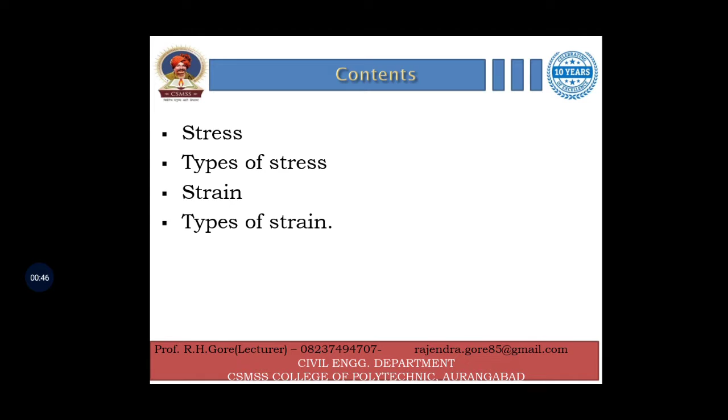तर आजच्या या लेक्चरमध्ये आपण बघणार आहोत स्ट्रेसेस, त्यानंतर इट्स टाईप्स, स्ट्रेन अँड ऑल्सो इट्स टाईप्स. तर फर्स्ट सुरुवात करूयात स्ट्रेसपासनं.

द इंटरनल रेजिस्टिंग फोर्स डेव्हलप पर युनिट क्रॉस सेक्शनल एरिया इज डिफाईन्ड ॲज स्ट्रेस. म्हणजेच जर बॉडीवरती एखादा एक्सटर्नल फोर्स अप्लाय केला आणि त्यामुळे जो इंटरनल फोर्स डेव्हलप होतो, तर त्या इंटरनल रेजिस्टिंग फोर्स अपॉन क्रॉस सेक्शनल एरिया, म्हणजे जी क्वांटिटी भेटेल ती म्हणजे स्ट्रेस.

जसं की एखादी रेक्टँग्युलर बॉडी कन्सिडर केली आणि त्याच्यावरती P किलो न्यूटनचा फोर्स अप्लाय केला, आणि त्या बॉडीचं जर क्रॉस सेक्शनल एरिया A असेल तर स्ट्रेस काय होईल - P अपॉन A.

सेकंड डेफिनेशन आहे स्ट्रेसची - इंटरनल रेजिस्टन्स अगेन्स्ट डिफॉर्मेशन्स. सेम आहे दोघांचाही अर्थ. स्ट्रेस इज डेनोटेड बाय अ लेटर सिग्मा, इज अ ग्रीक लेटर, and the SI unit of stress is Newton per mm square or kilonewton per meter square or megapascal or gigapascals.

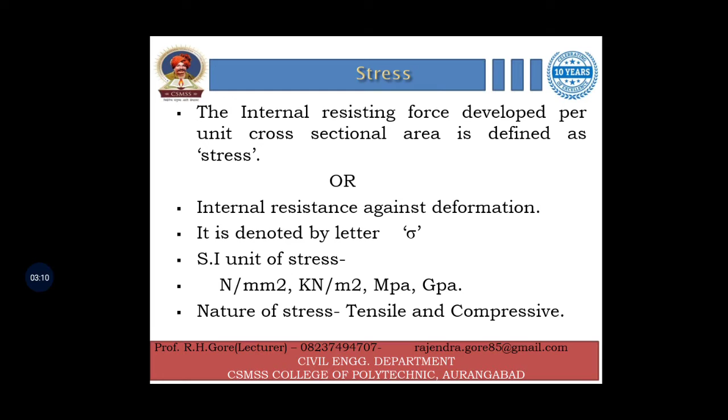तर नेचर ऑफ स्ट्रेसेस जे असतात ते टेन्साईल किंवा कॉम्प्रेसिव्ह असू शकतात. जनरली टेन्साईल स्ट्रेसेस आपण पॉझिटिव्ह कन्सिडर करतो फॉर साइन कन्व्हेन्शन, आणि कॉम्प्रेसिव्ह स्ट्रेसेस हे निगेटिव्ह कन्सिडर करतो.

तर या ठिकाणी डायग्राममध्ये बघू शकता - एक सर्क्युलर क्रॉस सेक्शनल बॉडी किंवा रॉड कन्सिडर केला आहे आणि त्या रॉडवरती एक्सटर्नल P किलो न्यूटनचा फोर्स टेन्साईल नेचरचा अप्लाय केला आहे.

Due to this P kilonewton load in body, there is internal resisting force R is developed. So this R or internal resisting force is equal to the external applied force up to the certain limit, means up to the elastic limit.

तर त्या इलास्टिक लिमिट ज्या आहेत त्या बघणारच आहोत आपण स्ट्रेस स्ट्रेन कर्वमध्ये. त्या लिमिटपर्यंत जर बॉडीवरती लोड अप्लाय केलेला असेल तर इंटरनल रेजिस्टिंग फोर्स is equal to the external applied load. So sigma is equal to, means stress is equal to resisting force upon cross sectional area.

So resisting force is denoted by capital R and cross sectional area is capital A. So R by A, resisting force is equal to the external applied force P. So P by A is stress. Sigma is equal to P by A.

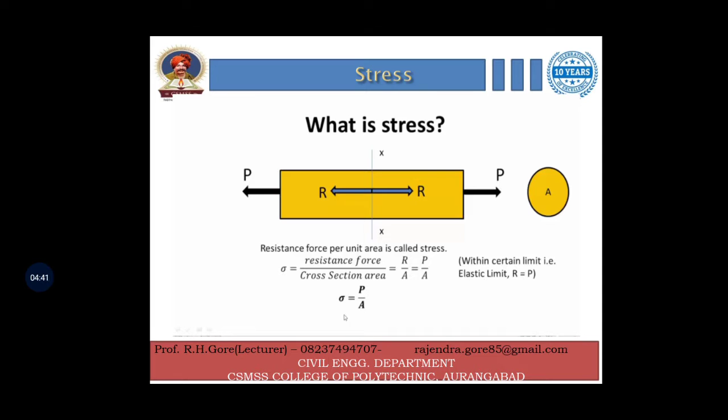Then types of stress. There are generally three types: direct stress, shear stress and bending stress. And the direct stress is also divided into two types: tensile and compressive stress. So first, direct stress.

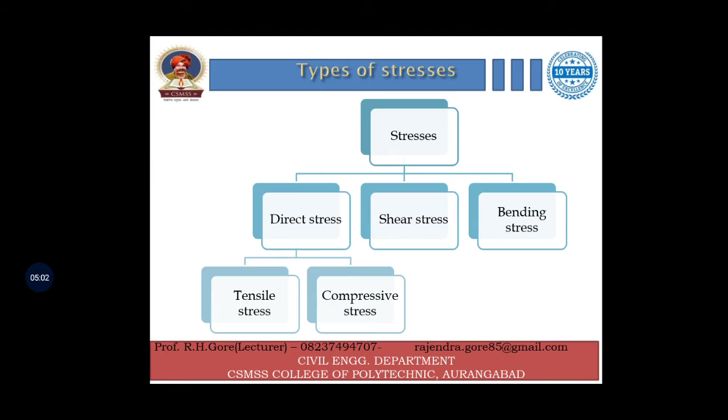So direct stress is also called as normal stress. The stress which acts normal to the plane on which the force acts axially are called as direct stress or normal stress.

म्हणजे असा स्ट्रेस जो की बॉडीच्या प्लेनवरती नॉर्मली ॲक्ट केलेला असेल, म्हणजेच परपेंडिक्युलर डायरेक्शनला जर प्लेन असेल, परपेंडिक्युलर टू द प्लेन जर लोड असेल, तर तो स्ट्रेस असतो डायरेक्ट स्ट्रेस. आणि डायरेक्ट स्ट्रेस इज डेनोटेड बाय सिग्मा सफिक्स 0.

आणि डायरेक्ट स्ट्रेसचे 2 टाईप्स आहेत. देअर आर डिवायडेड इंटू 2 टाईप्स, टेन्साईल स्ट्रेस आणि कॉम्प्रेसिव्ह स्ट्रेस.

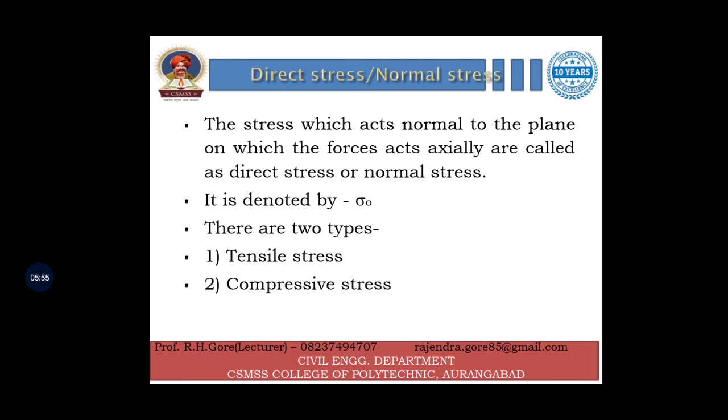So tensile stress, when 2 equal and opposite pull is applied on the member, then member or body is subjected to tension and stress so developed into the body is called as tensile stress.

म्हणजेच एखाद्या बॉडीवरती जर आपण पुल नेचरचे फोर्स किंवा लोड ॲक्ट केले, तर त्या बॉडीमध्ये जो स्ट्रेस डेव्हलप होणार आहे तो होणार आहे टेन्साईल स्ट्रेस डेव्हलप. सो पुल नेचरचे फोर्सेस म्हणजे कसेच, तर यामध्ये फिगरमध्ये बघू शकता तुम्ही.

Consider this is a body and the load acting on each, the arrow or the load is acting away from the body, that is called as pull nature of force.

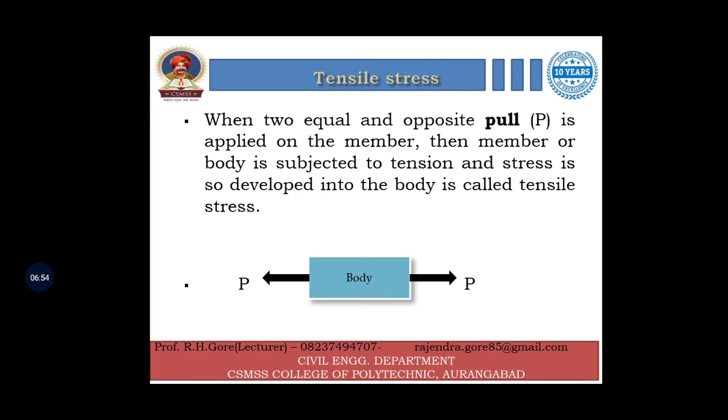Tensile stress is denoted by sigma suffix t. So tensile stress is applied or internal resisting force upon area, so P upon A. So P is axial tensile force and A is cross sectional area.

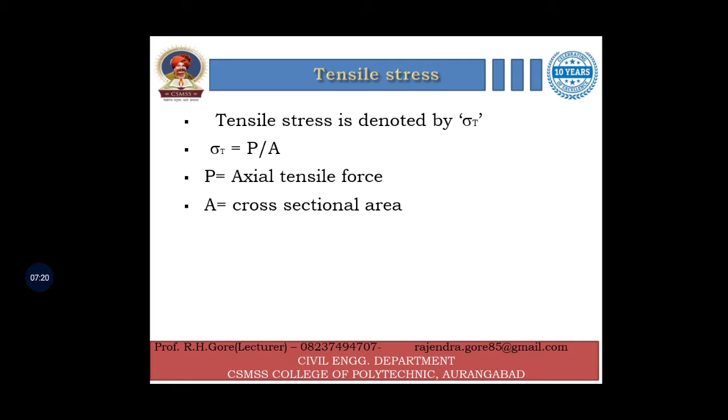Then compressive stress. When two equal and opposite pushes are applied on the member, the member or body is subjected to compression, and the stress so developed in the body is called compressive stress.

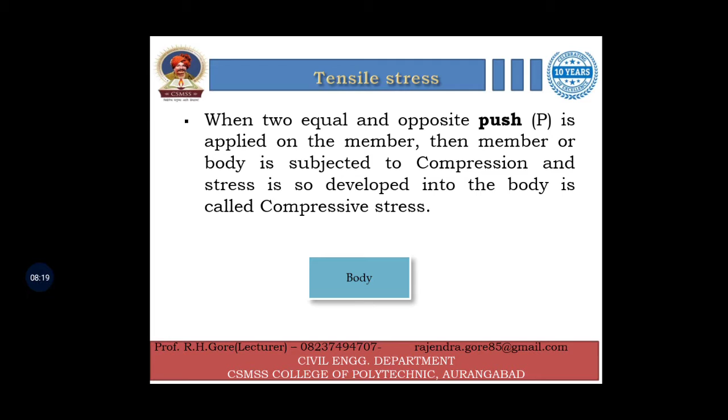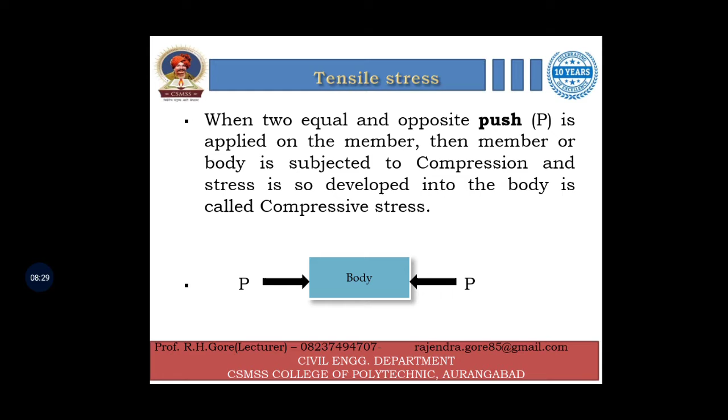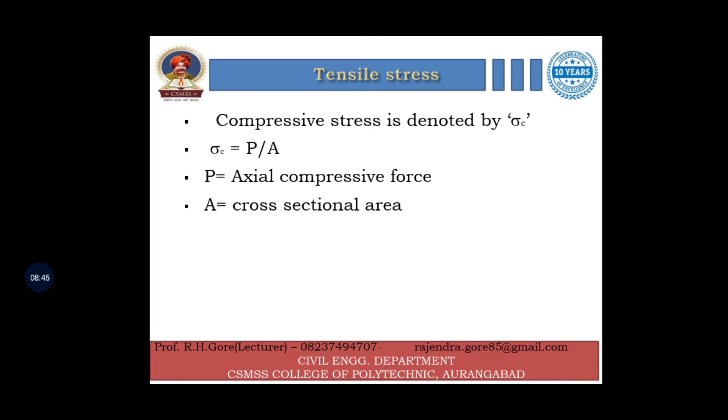Consider a body, and the load acting towards the body is called compressive load. This P kilonewton load compresses the body from two sides. Compressive stress is denoted by sigma suffix C for compression, and T for tension. So sigma C is equal to P by A, where P is axial compressive force and A is cross sectional area.

Then shear stress. When equal and opposite forces act tangentially on a body across the resisting section, the body tends to shear off or slide across the section. In such a case, the stress so developed in the body is called shear stress.

When a tangential load is applied on the surface of a body, this force is called shear force, and due to this tangential or shear force, the stress developed is called shear stress. Shear stress is denoted by the letter small q or tau, and its SI unit is the same as stress unit, Newton per mm square, or megapascal, or gigapascal.

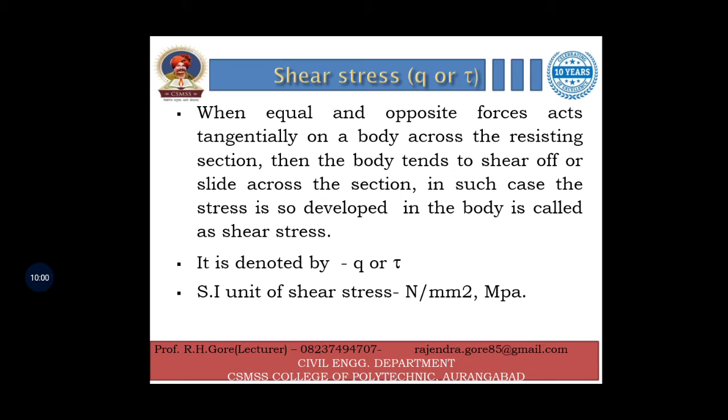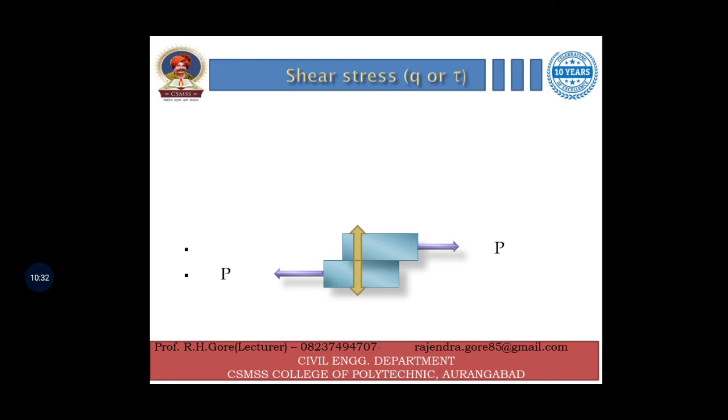Consider two rectangular plates connected by means of rivets or bolts, and two tensile forces P kilonewton applied on these plates. Due to this external applied force P, the body tends to shear off or slide on each other's plane. In the section of the rivet, the stress developed is called shear stress, and the plane on which shear stress is developed is called the plane of shear. The load P is called shear force.

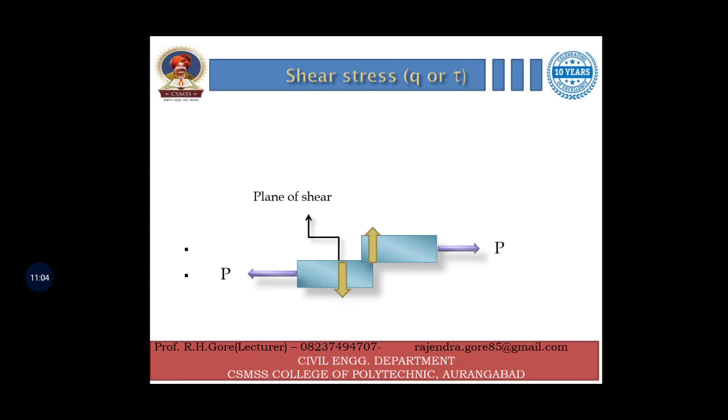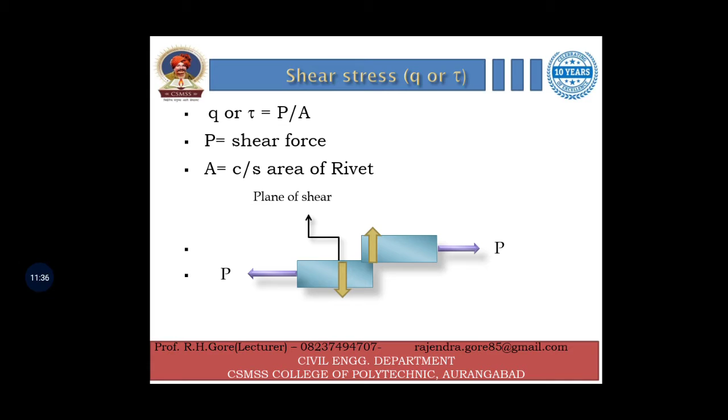So shear stress Q or tau is equal to P upon A, where P is called shear force and A is the cross section of a rivet. Why is the area of the rivet considered? Because the shearing action takes place in the cross section of rivets. So the area considered is the cross sectional area of rivet, which is pi by 4 into d square, where d is diameter.

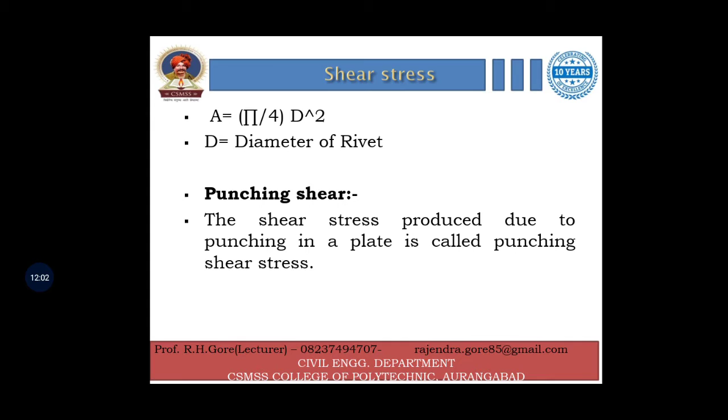Then punching shear. The shear stress produced due to punching in a plate is called punching shear stress. While punching the plate, the stress developed in the plate is called punching shear stress. Consider a rectangular plate having thickness T and a punch having diameter D. Due to applying compressive force on the punch and plate, the punching action takes place, and due to this punching action, shear stress is developed.

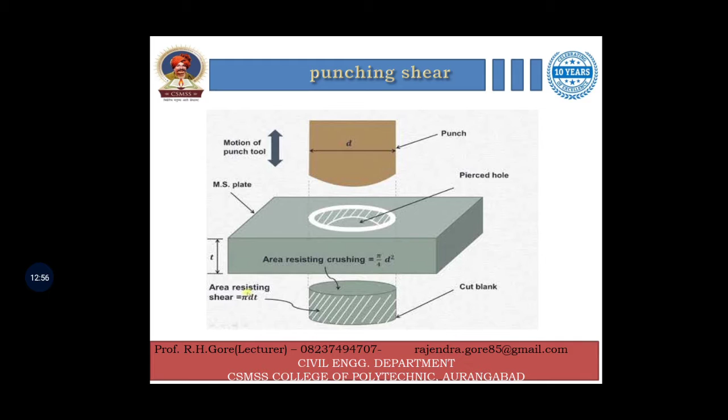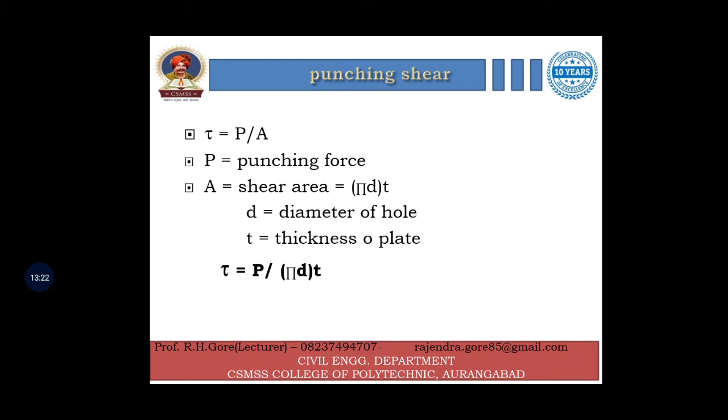The load applied on the punch is called shear force, and the cross sectional area resisting this shear force is the circumferential area of the plate, that is pi into d t. So punching shear stress tau is equal to P by A, where P is punching force or shear force, and A is shearing or resisting area, pi d into T, where pi is the circumference relation, d is diameter, and T is thickness of plate. So shear or punching stress is equal to P upon pi d t.

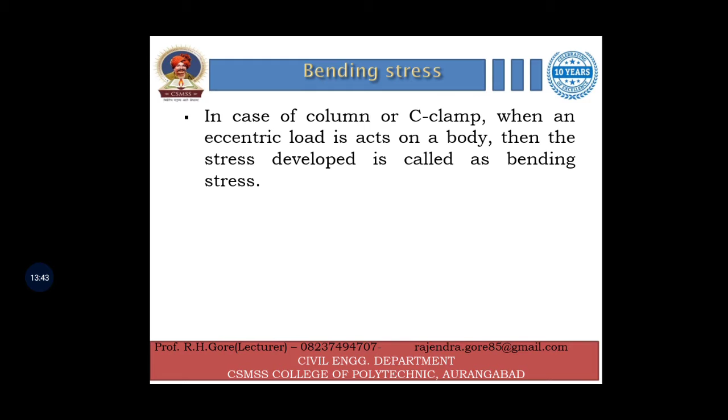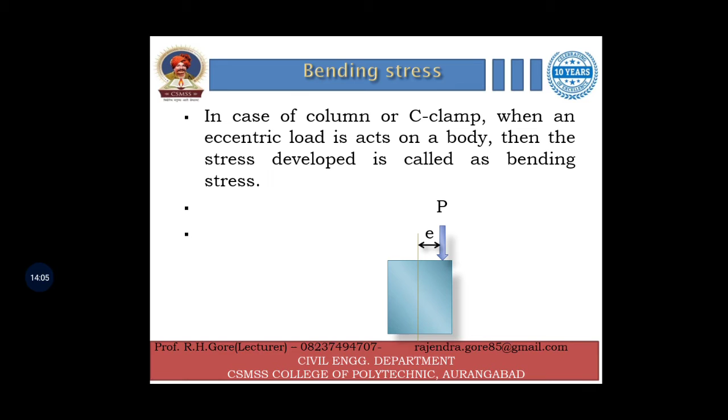Then bending stress. In case of a column or C-clamp, when an eccentric load acts on a body, the stress developed is called bending stress. Consider a column with an eccentric load P acting at a distance E from the centroidal axis of the column. Due to this eccentric load, the stress developed is called bending stress.

Then strain. When a body of elastic material is acted upon by an axial force, it undergoes a change in dimensions, and this change in dimension per unit original dimension is called strain. It is the ratio of change in dimension to the original dimension. Strain is denoted by the letter small e or epsilon, and since it is the ratio of two similar quantities, it is a unitless quantity. So strain small e is equal to change in dimension divided by original dimension.

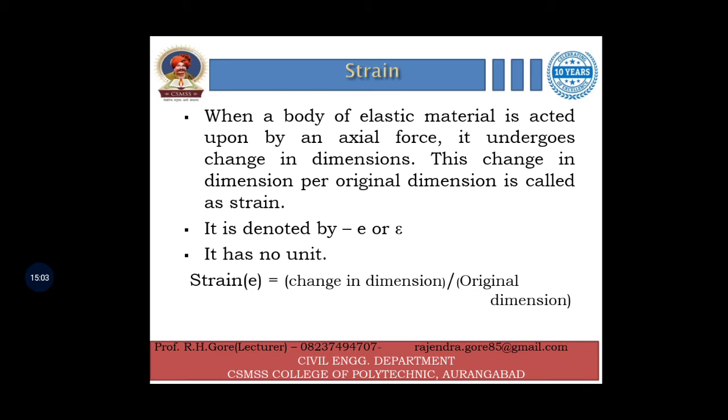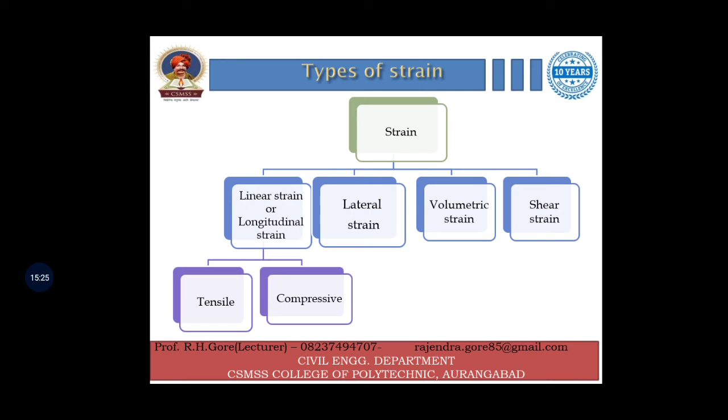So types of strain: first is linear strain or longitudinal strain, then lateral strain, volumetric strain, and shear strain. Linear strain is divided into two types, tensile strain and compressive strain. So first, linear strain.

When the body of elastic material is subjected to a load, then there is change in length in the direction of applied force, and this change in length per unit original length is called linear strain.

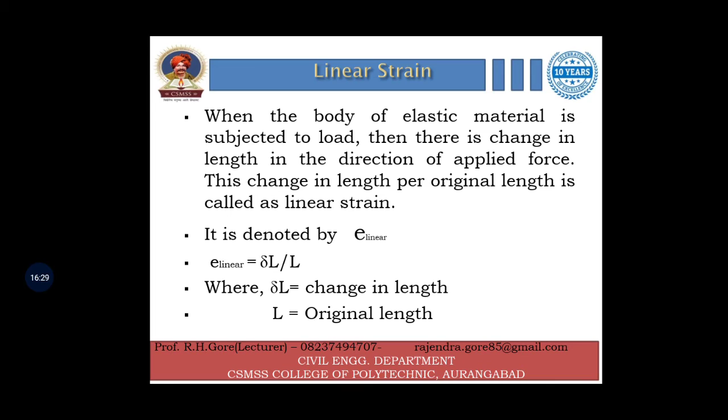Linear strain म्हणजे काय? It is the ratio of change in length to the original length, and linear strain is denoted by E suffix linear, where E stands for strain and linear is the type of strain. So E linear is equal to delta L by capital L, where delta L is change in length and capital L is original length. It is the ratio of these two quantities.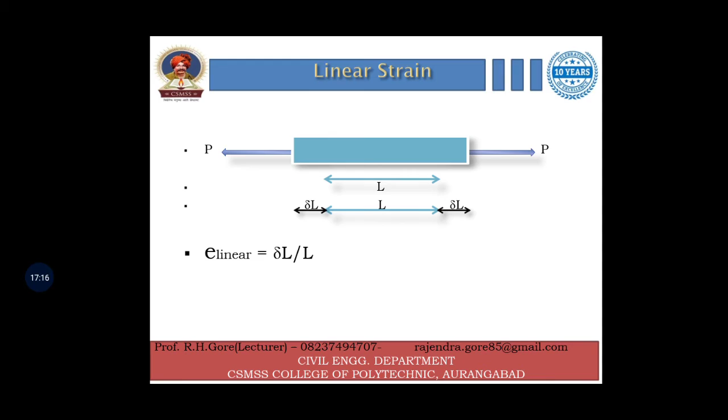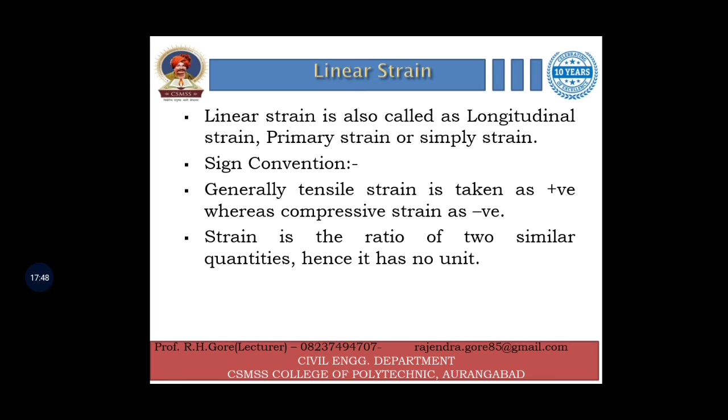Consider a rectangular bar subjected to tensile force P along its length, having length of bar L meter. Due to this applied tensile force P, the bar gets deformed by delta L, its change in length, and the ratio delta L by L is linear strain. Linear strain is also called longitudinal strain, primary strain, or simply strain. The sign convention: tensile strain is taken as positive, whereas compressive strain is taken as negative. Strain is the ratio of two similar quantities, hence it has no unit.

Then lateral strain, the second type of strain. When the body of elastic material is subjected to load, there is change in lateral dimensions, meaning perpendicular to the applied force - change in width, change in thickness in case of rectangular bar, and change in diameter in case of circular bar. This change in lateral dimension to original lateral dimension is called lateral strain or secondary strain. So in linear strain there is change in length upon original length, and in lateral strain it is change in lateral dimension to original dimension. It always acts at a right angle to the direction of applied force.

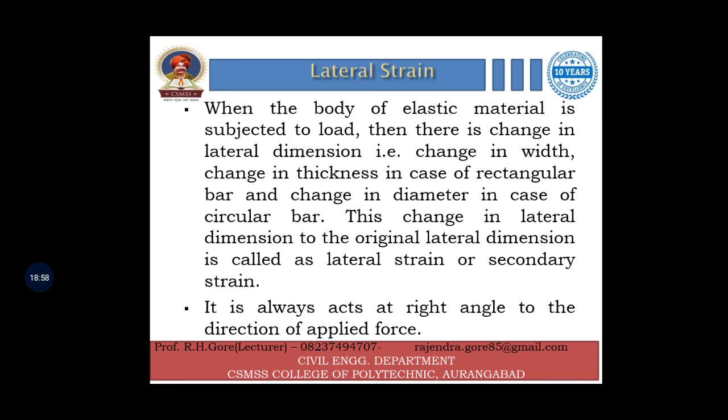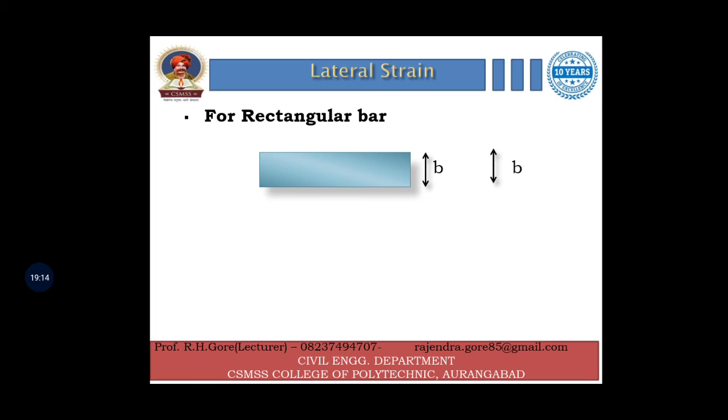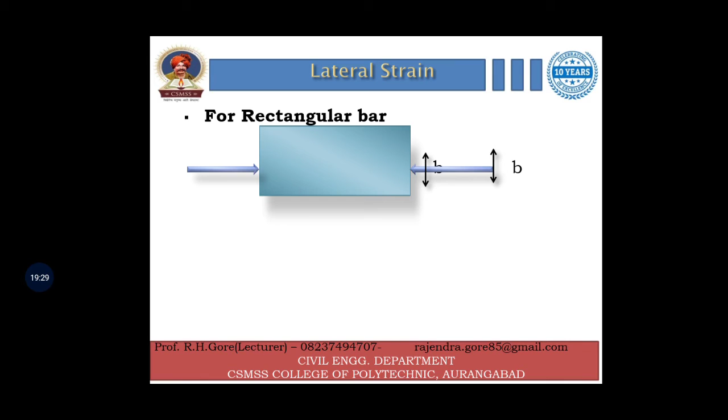The dimension changes at right angle to the applied force. In the figure we can see the detailed concept. There is a rectangular bar having cross-sectional width B and length L, and a compressive force P is acting on this. Due to this compression the lateral dimension changes as delta B from both sides, and this lateral strain is change in width upon original width, similar to linear strain.

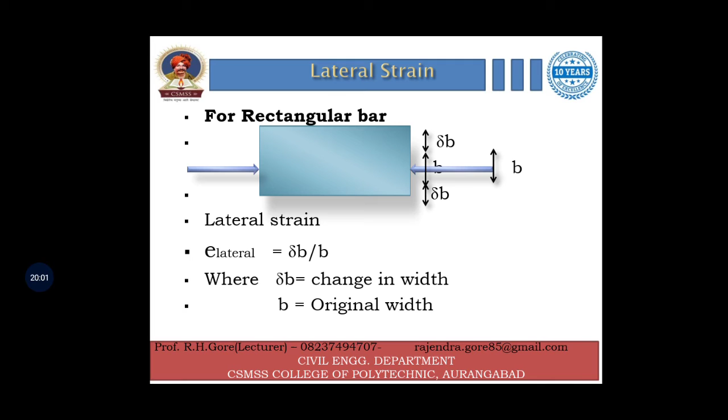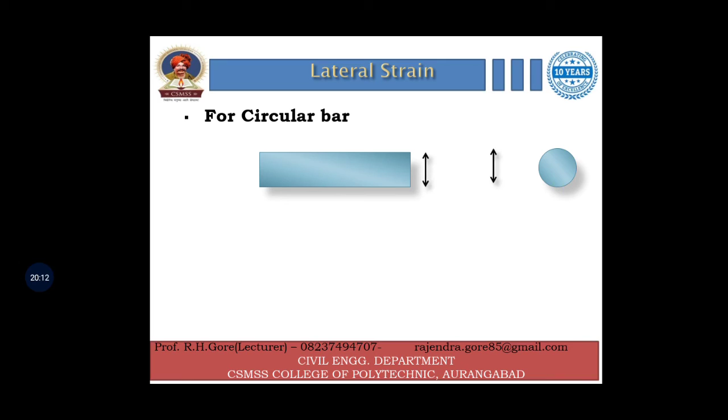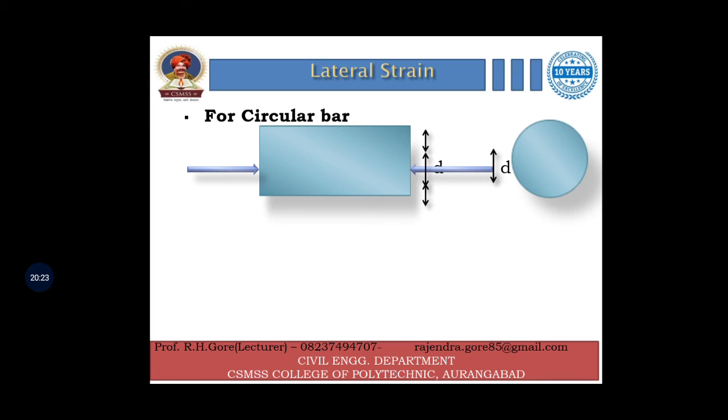In linear strain the longitudinal dimension changes, and in lateral strain the lateral dimension changes - change in width upon original width in case of rectangular bars. In case of a circular bar having diameter d, due to the applied compressive force the cross-sectional dimension changes, so there is change in diameter. This change in diameter to the original diameter is also called lateral strain.

Note: when axial tensile force acts on a body, its length increases but width and thickness decrease, since due to the extension of length, the other two dimensions decrease. And when compressive force acts on a body, its length decreases and width and thickness increase.

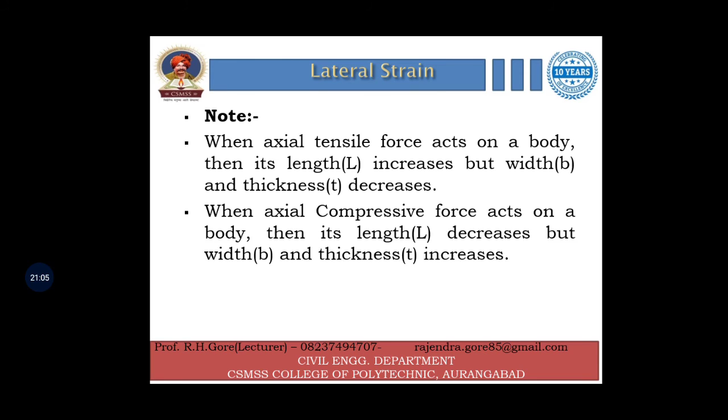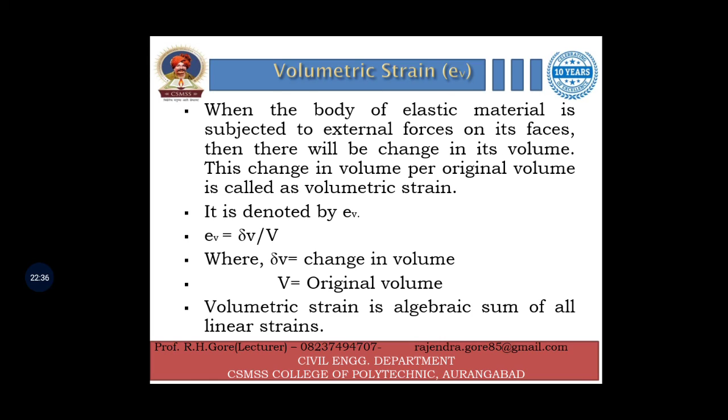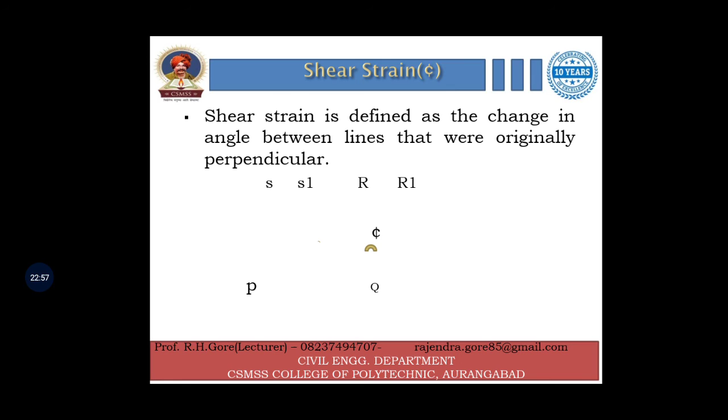Then shear strain. Shear strain is defined as the change in angle between lines that were originally perpendicular, due to the applied force. Consider a rectangular body on which external force P is applied, and due to this P the body will slide or shear off at point S to S1 and point R to R1, and this change in angle from the perpendicular angle to theta or phi is called shear strain.

So phi is equal to the change in angle, which is called shear strain. Shear strain is denoted by the letter phi, and this phi angle is known as shear strain. It is calculated by the opposite side upon adjacent side, so phi is equal to RR1 upon RQ. This change in angle is called shear strain.